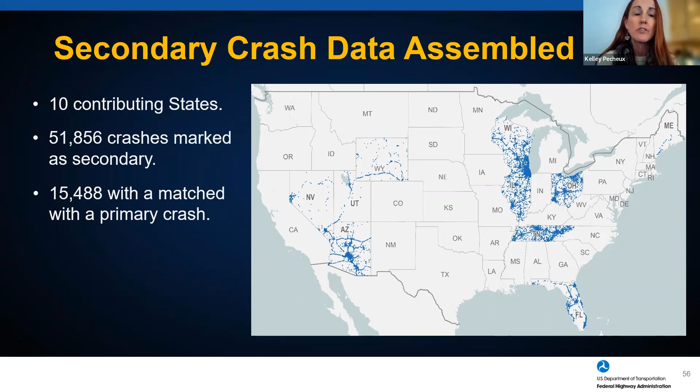These were the locations in those crashes where we were able to find a crash that we felt was a primary crash candidate. So we actually have that crash-to-crash relationship for a little more than 15,000 of the crashes. And those were the crashes that we focused on for the analysis.

So this is just a quick breakdown. One of the things I think many of you have probably heard in the past is that as many as 20% of crashes could be secondary in nature. We didn't really see that in the data that we collected. This is a breakdown of the number of crashes that were marked as secondary in each state, and that number divided into the total number of crashes for the same time period that we received from the state.

Ranged from about 0.25%, 0.28% up to a little over 3%. So on average, just about 1% of the crashes. That number goes down when we try to make that crash to crash relationship to fewer. So just to put that percentage of secondary crashes into perspective a little bit, significantly less than some of the numbers that have been thrown around in the past based on the data.

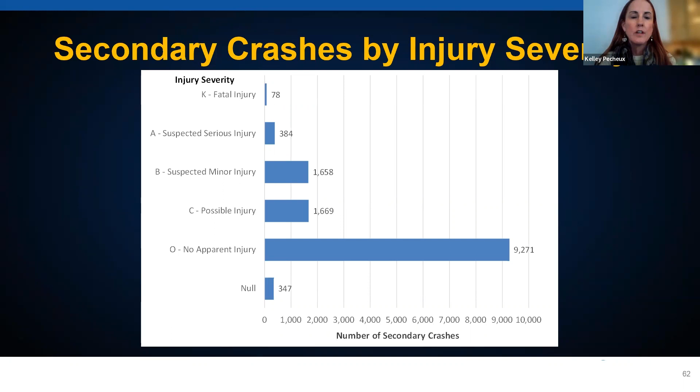Looking at severity, while you have all kinds of injury severities, the large majority have no apparent injury, but a few fatals and suspected serious injuries as well. So this is another one where I think sometimes it's thought that maybe secondary crashes are more severe in nature, and while we do see those, most of them really don't involve an injury.

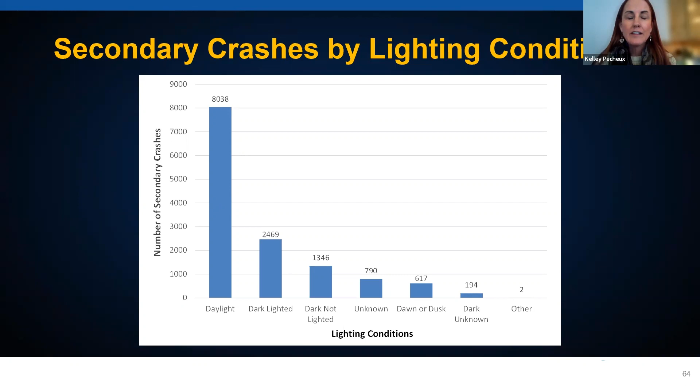So we matched a secondary crash that we had in the data. The only state that we had that had a connection between a primary and a secondary crash was Wisconsin. So in most cases, we only knew that this was flagged as a secondary, but we didn't know what the primary crash or primary incident was. So that's why we did that matching to try to find the primary.

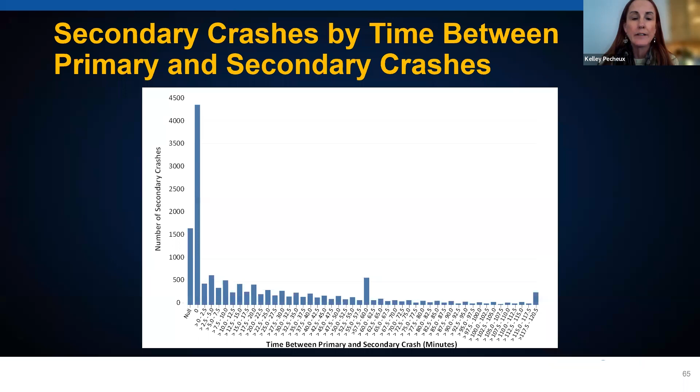So with that very quick overview of the data, I'm going to turn it over to Grady to talk a little bit about the secondary crash typologies and the case studies that we developed.

Awesome. Thanks, Kelley. So this is really a very interesting study, having looked at about 52,000 secondary crashes and more than 15,000 primary events that were linked with those secondary crashes. So the descriptive statistics that Kelley was able to show you really kind of paint a picture of what's going on with those secondary crashes. But we wanted to do a little deeper dive.

So what we did is we took several hundred of those crashes, and we looked at and analyzed the report narratives and diagrams from the actual police crash reports, and we created some coding to go along with those reviews of those narratives and diagrams.

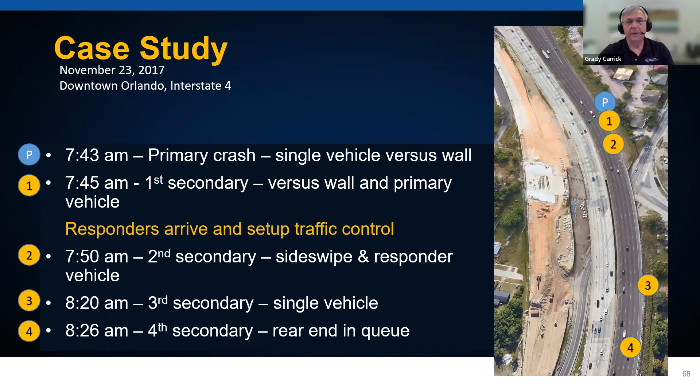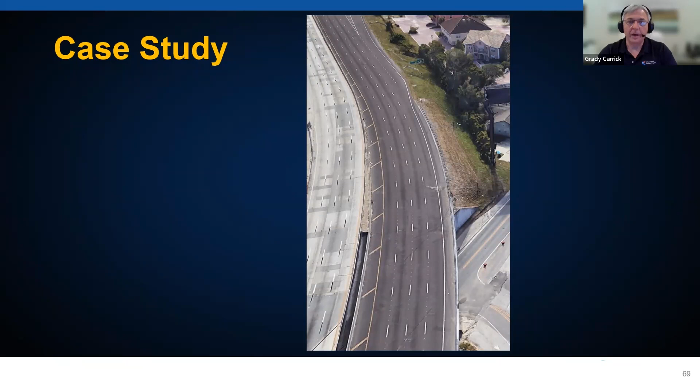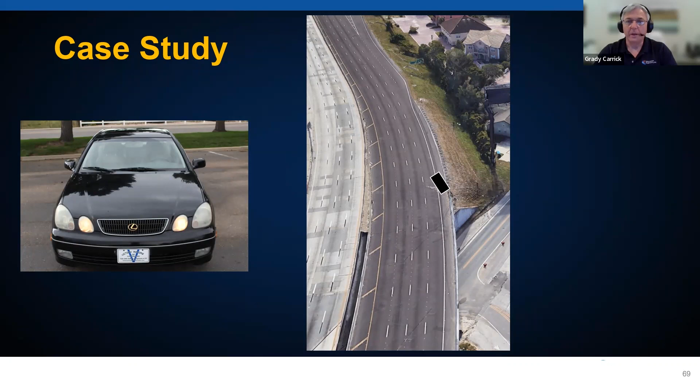So here's kind of a sequence of the events. So we'll click through these just to kind of show you what's going on from those crash reports. So the first, here's the roadway segment that we're talking about. And so that first crash occurs, and it's this Lexus that's driving along. We'll go ahead and click up to that, and they spin out and hit the wall on the right side. And they actually wind up facing the wrong direction over on the right side of the road.

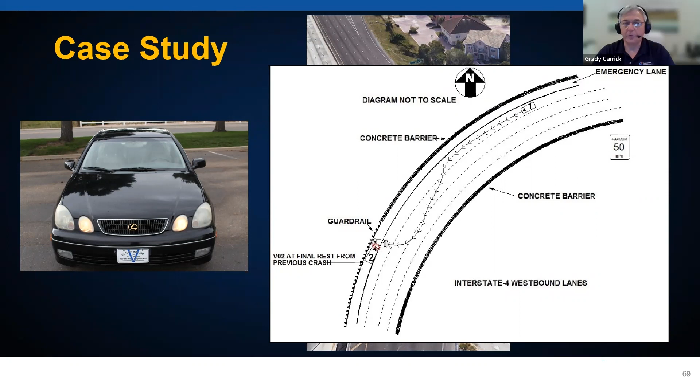Next slide. So here is that first secondary crash. Driver's driving along in the outside lane, sees something up ahead, decides to change lane, gets a little squirrely because, again, this roadway's wet. And there's a slight curvature to the roadway, maybe misjudged their speed, got a little out of control and wound up going over and striking the first vehicle and striking the guardrail.

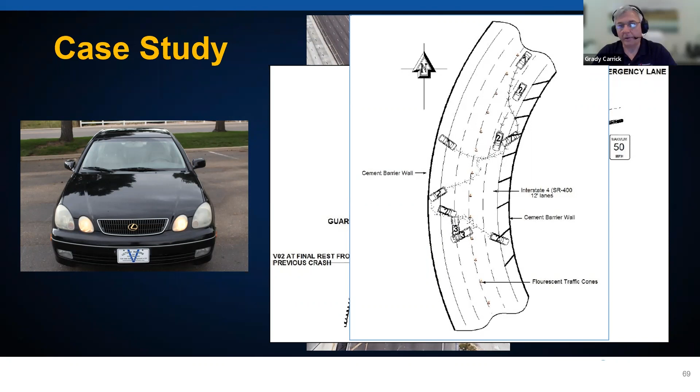Next slide. So here's where we get on the scene. We put up our cones and our arrow boards. That vehicle 3 that's in the lower center part of your diagram there is the road ranger that's on scene with an arrow board. And you see vehicle 1 and vehicle 2 coming around the corner in lane 2 and lane 1. And again, there's a lane change that is attempted. The vehicle loses control, hits the other vehicle. They both wind up going into the temporary traffic control area, striking the wall and striking our road ranger.

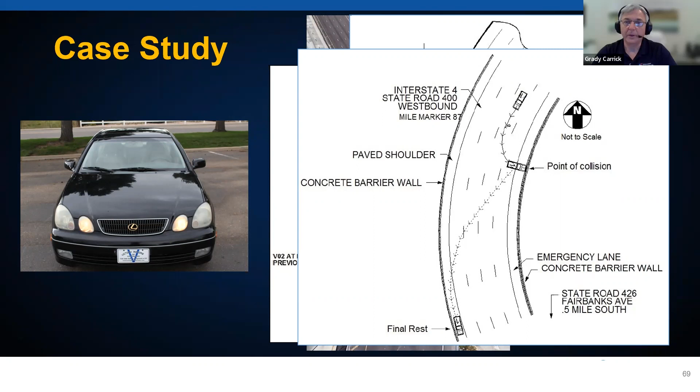Next slide. There's our next single vehicle, a little further upstream. The road still curves further upstream, but you can see here there's no guardrail. It's concrete wall back there. Hits the inside and then goes out to the outside and comes to final rest. That creates a lot of onlooker delays, and that's when traffic starts backing up. And the last crash that we see happens. And let's pop that diagram up there. And that's your typical rear end collision in the upstream area.

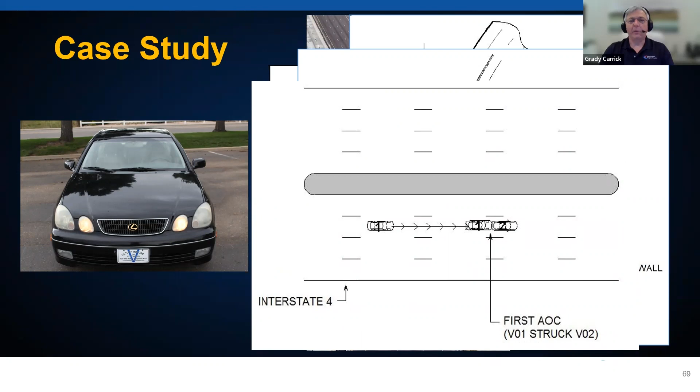So let's click on forward now. We'll see, we're lucky enough to have an actual video. So there's our road ranger set up, law enforcement's there, and these are the vehicles that intrude into the scene. And again, just careless folks, light traffic, on a morning with a little bit of rain, and you can see they just get out of control and strike our responder vehicle. All right, let's go ahead.

Next slide. So to wrap up this one, we had 4 secondary crashes. Now, we learned from our data analysis that the majority of the time these secondary crashes do not involve injuries. But in today's example, with these 4 secondary crashes, we actually had 3 of the 4 involved more serious injuries, and all 3 of those required transportation with incapacitating injuries or non-incapacitating injuries in the 4th one there. So not too serious of injuries, but enough for them to take a ride to the hospital.

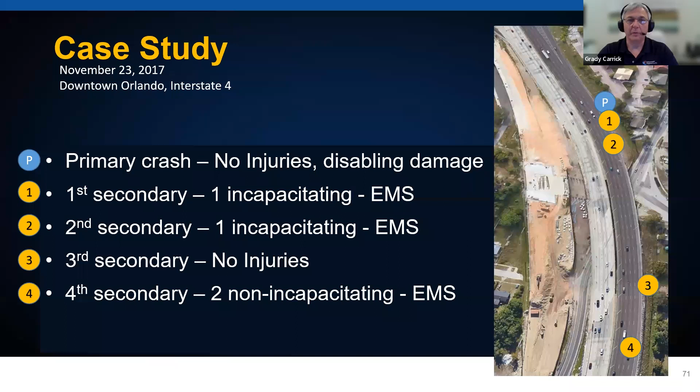Next slide. So the next case study is the southern part of Florida, down around the Stuart, Fort Pierce area. And this is about 4:50 in the morning. This is on Interstate 95. There's a large truck driving along, and he's not paying attention. And the pickup truck in front of him is driving a little bit slower. He doesn't really perceive that there's a danger until the last moment, and he rear ends that pickup truck, goes off to the side of the roadway, off to the right, hits a light pole, goes down the embankment, and comes back up on the other side and hits a fence.

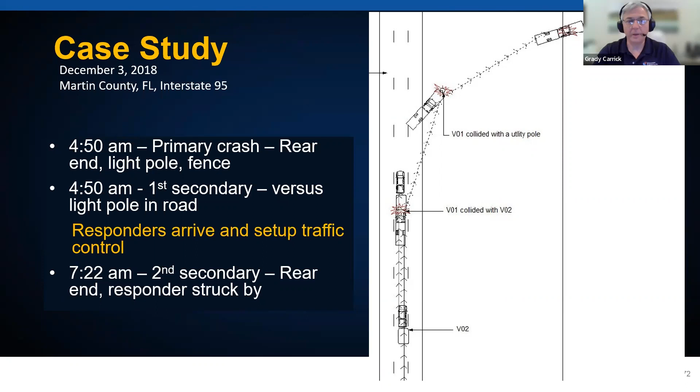So a lot going on here with this crash. Fortunately, there were not a lot of serious injuries here in this first event, but it did cause that light pole to fall down on the outside lane of the roadway. And again, that bang bang type situation, a vehicle comes along in that right-hand lane and hits the light pole that's down in the road because it had literally just fallen in front of them. We get our responders on the scene, and they set up a pretty nice traffic control. Let's go ahead and click forward, and you can see the traffic control that's set up. So we've got a couple law enforcement officers on the scene.

We actually had 3 arrow boards out here. We've got the right lane of 3 lanes blocked. They did a nice job of setting up a good protected area with a lane +1 to give all these responders a little extra room to work. We've got that pole that they're dealing with. We've got this vehicle that's off the roadway that's going to have to be recovered with a heavy wrecker.

But what I want you to focus on is in the inside lane, lane 1, you see that white van with the ladders on the top. That's the guy that's going to come along and cause things to really get ugly here. The vehicle in front of him is an Audi sedan, and that Audi's going to check up a little bit, going to slow a little bit, and that van is not going to slow.

We're clipping along at pretty close to highway speeds here. It's free flow conditions, and he's going to get into the back of that Audi and send it right into our scene. So let's click forward and see the video from that. So what we see here is he's hit the back of that Audi, and that Audi has come into our scene. Trooper pushes the person out of the way.

Again, they're over on the shoulder, and just for the sake of not wanting to expose anybody to anything too terrible, I paused the video here, but the trooper does get struck, requires transportation. Trooper's out of commission for several months, but was able to come back to work. So again, let's click forward and take a look at what happened here.

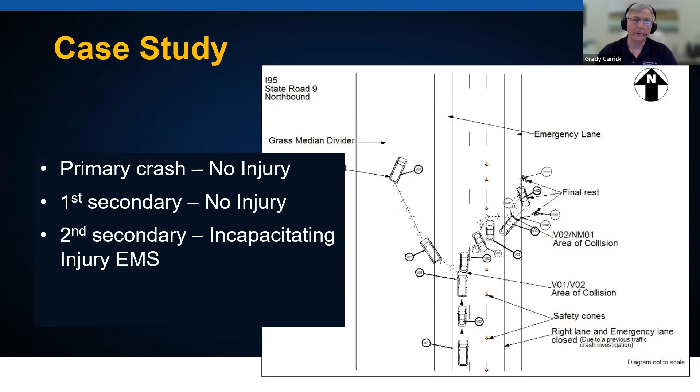So some of the findings, to summarize the research that Kelley and I worked on, we found that mostly interstates, principal arterials, urban areas, and clear weather were present. A lot of times these don't involve injuries, but when they do, they can be pretty serious and fatal. 2/3 of them are front to rear. It's that classic rear end crash that we all know about for secondaries. 10% though are same direction sideswipe, and 10% are single vehicles.

Close proximity to our initial crash, happening at the same location and in close proximity in time. A lot of times these secondaries are happening before we're even on the scene. But that doesn't mean that TIM is not a good strategy to prevent secondary crashes, because we know that once we get there, if we can do the things that we do, we can make it safer, but we can't always make it bulletproof. So we've got to be constantly on alert, on our situational awareness, and making sure our head is on a swivel.

Next slide. So as far as secondary crash data goes, we really would like to see better linkages between that primary and secondary event. If we can actually have the report numbers in the opposing primary and secondary reports, that would be very beneficial for researchers like us to go back and pull the two and marry them up. While we did this analysis combining 10 states and 52,000 crashes, we think you can do a lot with your data at a state level if you're collecting this particular type of data. So we want to encourage regional and state analysis.